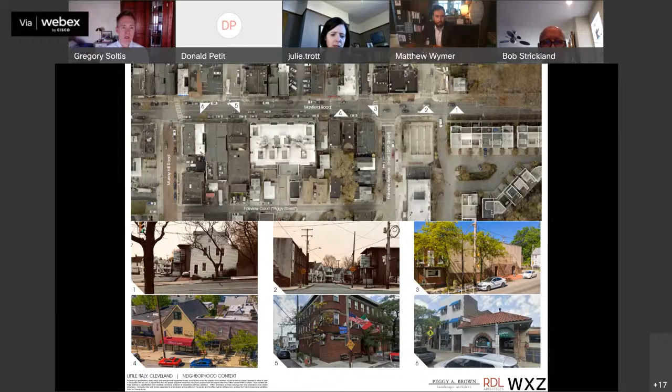So, existing context: Mayfield Road is the primary commercial thoroughfare through Little Italy, consisting primarily of mixed-use buildings, with the exception of a couple townhouses at the top of the hill and the church at the bottom. It's really all mixed-use buildings. These two buildings we're renovating have residential uses on the ground floors, which is inappropriate and not contextual to the street, but that was driven by fluctuations in use and demand.

Next slide. Here are some more images along Mayfield Road showing the context. You can see in the top right photo, number 3, what the buildings look like today — both facades have been sealed up and turned into residential apartment units. Next slide.

Mr. Soltis? Yes. I hate to interrupt you, since you covered this very well last time. I don't know if we need to go through all the detail, but would love to highlight the changes and the main things with the design, since you did a great job explaining the context last time. Thanks for being so kind and pushing me along.

Alright. I'll just mention real quickly that Piggy Street is a very different context. It's got a lot of service uses, garages. It's an alley street. There are some residential houses on the street, but it's a mix of all those things, and it's a completely different context than Mayfield Road. You can see some photos here. Next slide.

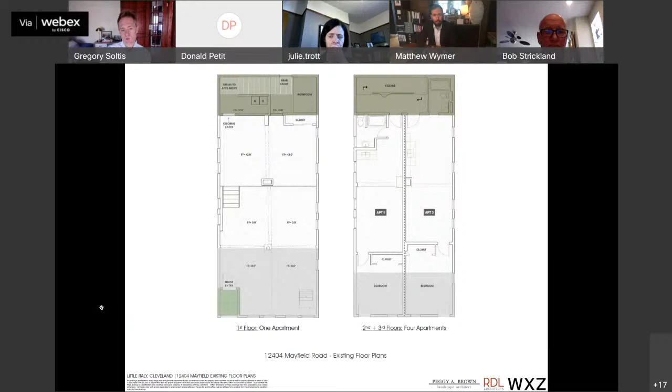This is what the 3-story building floor plans look like. What's really noticeable is that the front part of the building and the rear part of the building were additions, and the original building is the part in the center. It was an apartment on the first floor and then apartments on the second and third floors as well, 2 apartments on each floor.

The 2-story building had an apartment in the front and the back on the first floor, and the same on the second floor.

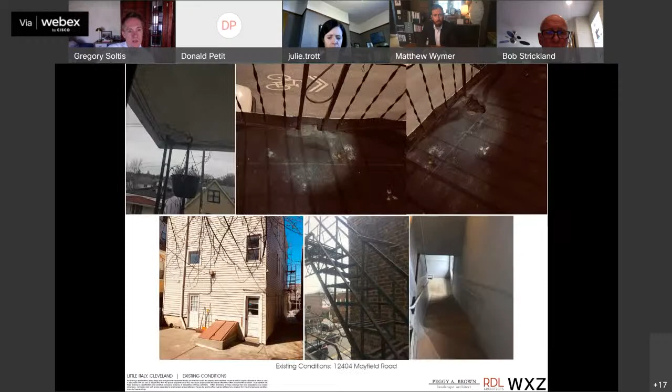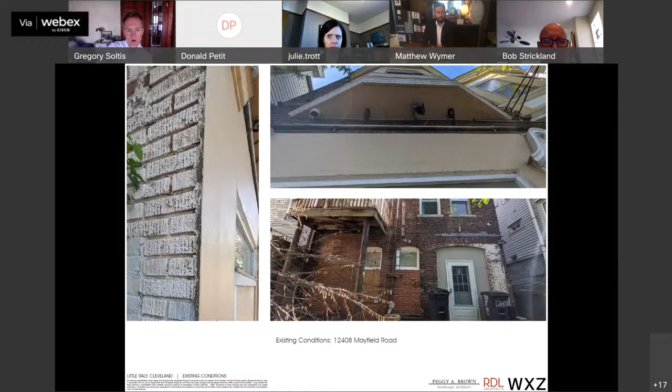These are some existing condition photos for the 3-story building, which is 12404. And this is for 12408. We plan on opening up those openings that have been bricked over.

You can see the condition on the front where they skim coated some sort of concrete material on the facade. Our plan is to try to remove that and replace the brick.

Some contextual photos of the 2-story building. The entrance is on the side on the alley.

That's the alley space that we plan on using as a primary entrance into the courtyard. The property line actually runs through part of that concrete on the left.

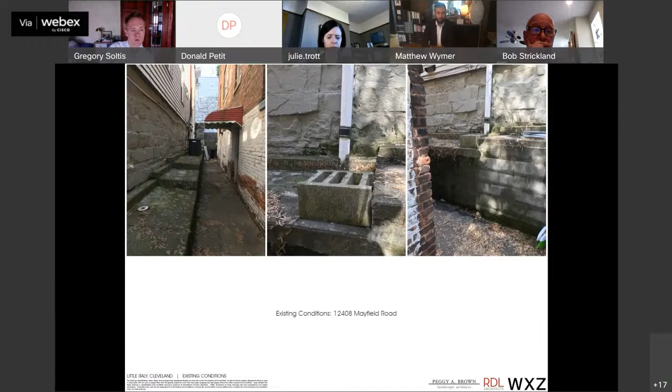Here are some photos of what the courtyard currently looks like. At the top, you can kind of see everything all together. The courtyard behind the 2-story building is lower than the one behind the 3-story building. The unit on Piggy Street actually is right behind the 3-story building. It seems like the 2-story building was built later than the other buildings, and they actually dug into the hill in order to create a flat sort of connection to the back.

This is of the building, looking from above on the Piggy Street building down into the courtyard. Existing conditions of the building on Piggy Street.

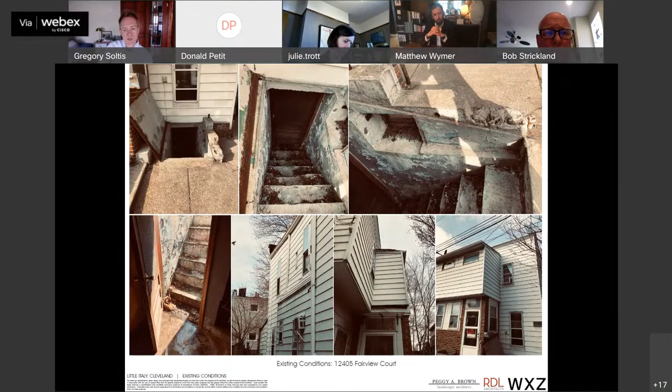Again, existing conditions. Interior conditions of the Piggy Street building. It was kind of hodgepodge together.

Okay, proposed plans. So you can see here, we are planning on renovating Building A and Building B, which you see to the right there facing Mayfield Road, putting commercial uses on the ground floor, demolishing the building on Piggy Street and building a new building that would accommodate parking for all 3 buildings on the ground floor with 2 condominium units above.

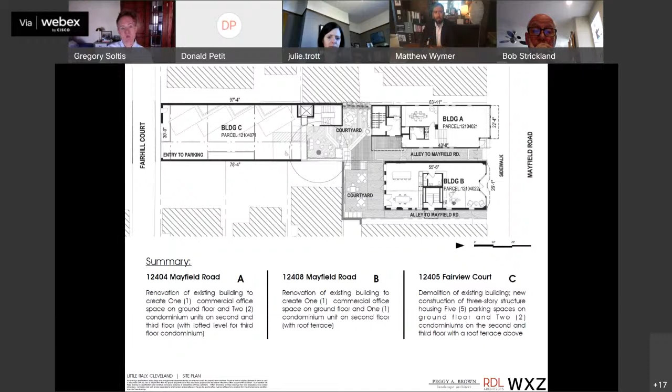Building A and Building B, their upper floors would also be condominium units, so it would be bringing for-sale housing into Little Italy, which is desperately needed, and then connecting the courtyard to create a shared space in the middle for all 3 buildings.

Peggy, do you want to go ahead and speak to the landscape plan? As Greg stated, there's a large tree in the middle of that courtyard, and one of the first things out of the client's mouth was that we need to save that tree. It's about a 36, 40-inch silver maple that's in pretty good shape.

So we're making every effort we can to save the tree, to the point of using pier construction, grade beam construction on the back of Building C, in order to not have any trenches back there for footers. And that's the same way we're using the deck material. So we're drilling holes and boring holes instead of cutting through the root system with trenches.

So on this plan, it starts to illustrate the upper deck. There's 3 different layers through here. You've got the upper deck, even with the level of the garage, then you step down into a median level deck with an umbrella table and some other sitting areas. The lower area, which is a paved area, is an entry for Building A. There's a ramp access out to the street from that point, so it's ADA compliant. And then you'll step down into the courtyard for Building B, the 2-story building, with a separate courtyard over there.

One of the interesting issues here was, what do we do with the trash cans? You drive around Mayfield area, Little Italy area, and all you see are trash cans all over the sidewalks and against buildings and whatever. So we've taken great strides to try and find places to hide those trash cans within the property so they can be wheeled out. You'll see the doors where they're closeted in some of these concealed areas that we're concealing with some screen fences and what we're calling a light tower. And then the ones for Building C will be within the garage at Building C.

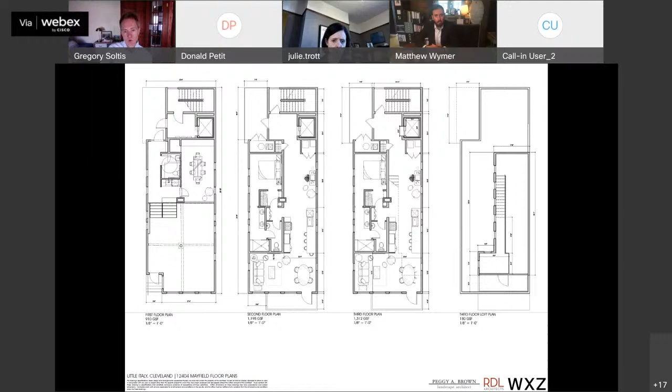And really defined the entry on the left with this tower, which is a condition that's kind of repeated throughout Little Italy on many buildings, and then highlighting the residential on the eastern, or really would be western, but on the right side, 2/3 of the building going up and having a change in materials, a metal paneling where you see the green gold, and then a fiber cement board siding. The building had wood siding originally, so we're proposing a fiber cement siding, recalling what was historically part of the building's architecture.

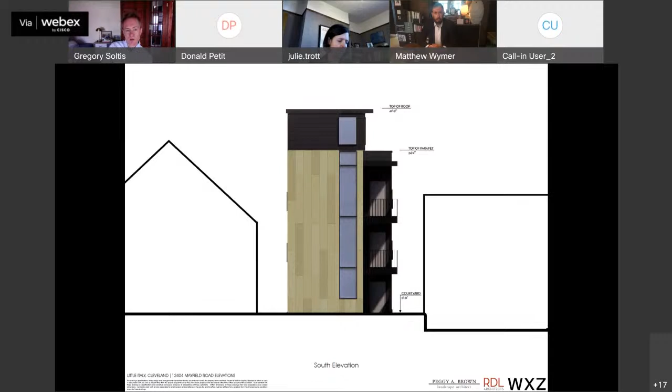Next slide. This is one of the alley views, which really no one's really going to see. The alleys are not wide unless you stand in there and look up, but this is what that facade looks like.

And then the balconies on the front that kind of overhang. And then the little loft that will have some sliding glass windows that open up on the top. Next slide.

For building 2, the first floor, we've created a core that has an ADA accessible restroom, a kitchenette space, and some storage that wraps the core for the retail and commercial space. The entrance to the unit from the alley is also within that core, shown there on the right off the alley space.

On the second floor, you can see the primary floor plan for the entire unit, which has stairs that go up to a rooftop deck.

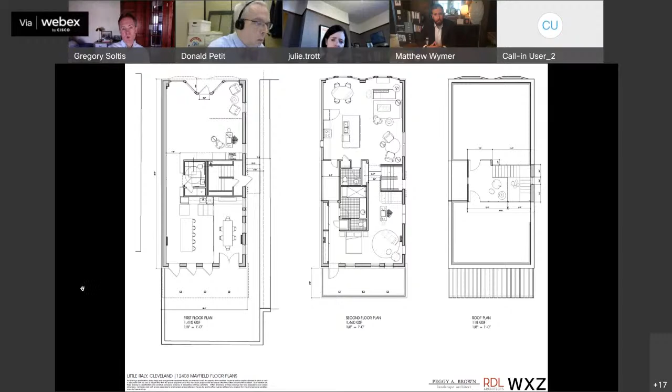We're going to restore the historic storefront, with a special door so we can get that bigger transom look all the way across, as seen in that historic photo. You can also see a little overhang on the side, further back in the alley, that denotes the entry to the residential unit up above.

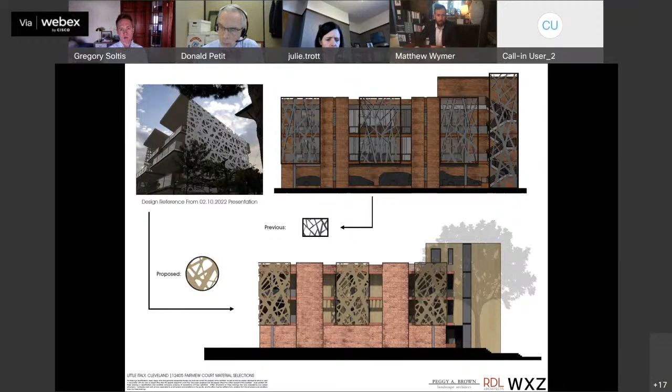Next slide. I think this was a concept image. That was the original elevation we showed you the first time around and how we've modified it down on the bottom. Next slide.

And here's our materiality, which I pretty much mentioned. This is we went through. Next slide.

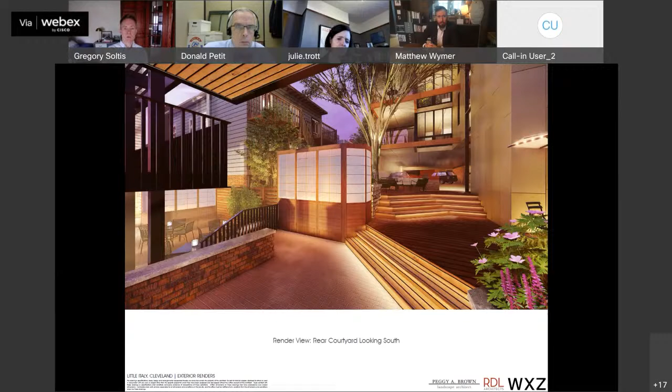So someone with a disability still, even though there are stairs and lots of grade change, still has the ability to enjoy the courtyard, whether from up there or down where we're standing right now. They can even be in the lower courtyard if they access that from the other alley on Mayfield Road. Next slide.

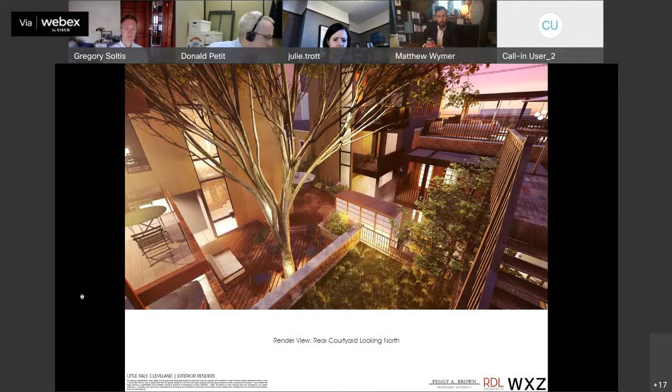This is a kind of an aerial view to give a better sense of how the courtyard all comes together. So you can see on the left, the new building on Piggy Street that has an outdoor sort of terrace for those units looking down into that decking that goes around the tree that Peggy mentioned to protect the tree's roots, steps that go down to that mid-level, and then steps again that would go down to the level where the entrance to the 3-story building is. You can see their balcony terraces kind of hanging off the back of the building there.

And then on the right, you get an idea of what that glass box on the top of the 2-story building would look like with the rooftop decks, the balcony in the back, and then the lower courtyard, and then again, that knuckle in the center of everything, holding everything together, that light tower. Next slide.

And I think that's the last, yes.

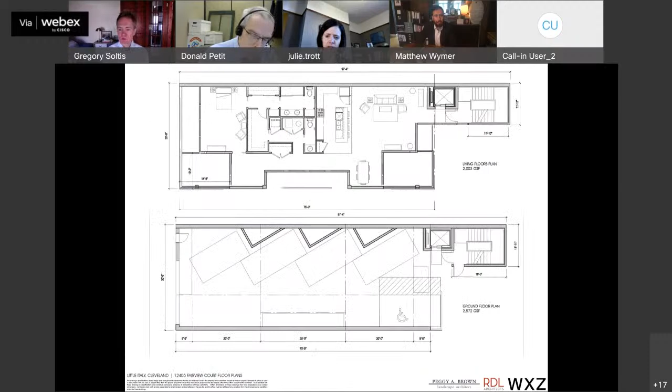We looked at the project several times conceptually, and we looked at it on April 19th for a vote. The fully renovated buildings on Mayfield Road, we think, are a great addition. Those buildings were in disrepair for years under the previous property owner.

We like the idea of how the storefronts will energize the street. With the addition of La Colina and these two projects, that whole side of the street has taken on a completely different life from what it was previously, an open lot and two storefronts used as residences.

So we really like the renovations the development team has made to those two front buildings. The committee really liked the plaza or garden area between the Fairview Court building and the Mayfield Road buildings, and thought it linked the two projects together nicely. We also like the idea of the for-sale housing, and the committee was okay with the demolition of the house on Fairview Court.

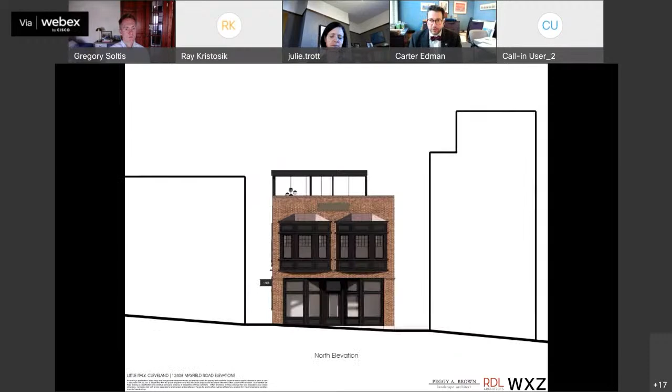Mr. Edman? Thank you, Madam Chair. I'll repeat a few things I said last time, but let me start by thanking you, Greg and Peggy, for the very thorough research and thoughtful, sensitive design approach. I particularly appreciate the additional renderings of the courtyard. I think that's going to be one of those extraordinary little urban open spaces, although it's not really a public space. It looks like a wonderful little space to be.

So I do have a couple of comments. On the Mayfield side, the facade composition and what you're doing with those buildings feels very appropriate in terms of the massing, the glazing, the relationship to the street. I may have mentioned this last time, but I want to comment on the dark gray and black coloration on both buildings. We see a lot of that right now.

I'm afraid that's going to look dated in a few years. When there's that much dark massing, it feels a little foreboding, particularly on the three-story building. I think it's probably appropriate for the rooftop level, like we see in this elevation, railings and things like that. But I'd like to suggest you consider some different coloration on both the clapboard siding and the bay windows here.

On this elevation, I wanted to ask about the copper metal roof panels on the bay windows. Does that have a coating on it, or is it allowed to naturally patinate? It's not actual copper, so it's a metal panel made to look like copper, so it will not turn green.

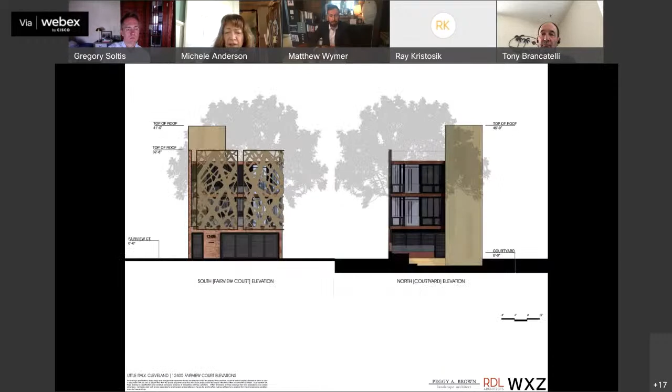The two bay windows on the two-story building — in all the historic photos, the bays are painted a lighter color so they stand out from the building, and these lighter colors also bring out the details of the bay windows. I would like to see something more along that historic line.

On the back of the building, I like the metal panels, but I also agree the design could be something a little more delicate. I'm not sure if there are other patterns incorporated into buildings nearby that could be used as a guide, made more abstract — I think the concept is neat, it's just that I'd like to see it executed with a little more finesse, a more delicate pattern.

So those are my comments. Thank you.

I'd say, for your comments and Mr. Edman's comments, that we are continuing our research — I've learned a lot about historic storefronts in the past couple months. So we're continuing to find appropriate historic colors, like Sherwin-Williams has in their palettes, and also refining the design on the panels in the back.

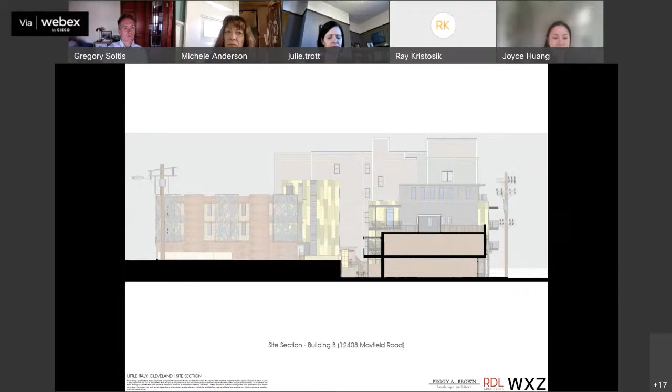Thank you, Director Huang, and thanks for recognizing the tree, the reference to the tree, because I forgot to mention that. I did not pay her to say that.

Thank you, Director. Mr. Strickland? Thank you, Madam Chair. I want to first start by commending the applicant and the architectural team for this fantastic project and the vision the owner has in rehabilitating these historic structures and replacing the one on the back.

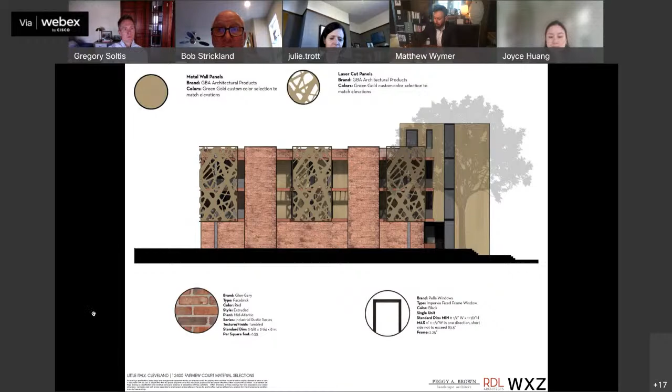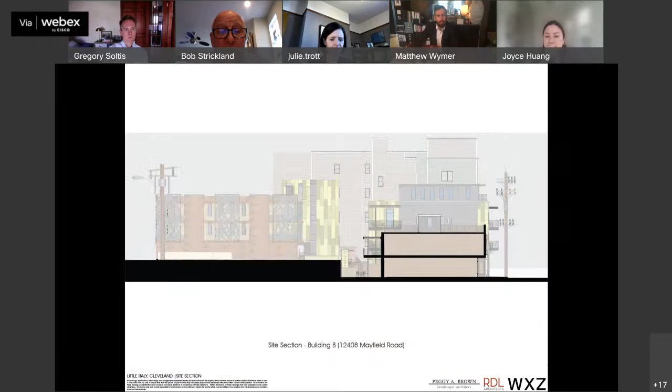In terms of the facades on Mayfield Road, Building B, the two-story building, clearly is a significant restoration of a historic building. I don't get that sense when I look at the three-story building. It looks like a totally modern building with no reference whatsoever to the historic fabric. So I certainly have a problem with that. I don't see why the focus was on clearly a historic restoration of Building B, and the same approach was not taken with Building A.

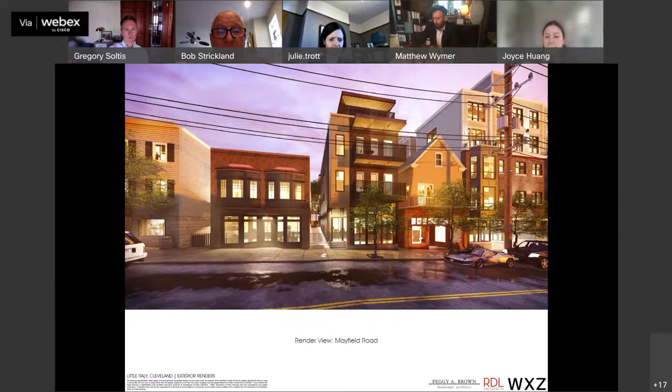Personally, I would like to see some semblance, some recognition that it still is a historic structure represented in the renovation of the facade. In terms of the back building, I had questioned during the concept phase what impact the western elevation of Building C would have on the adjacent neighbor. It looks like just a big blank monolithic brick wall, and I wondered if some articulation could be added to break up the monotony and its impact on the western neighbor.

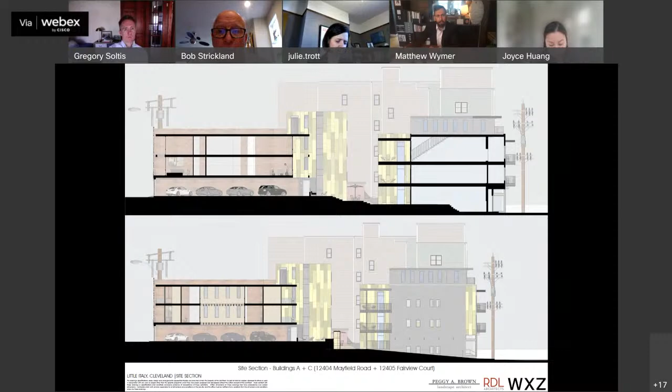Thank you for your comments, those are great. To deal with the wall first, Matt and I are looking at different brick types, or even, by fire code, if we could potentially introduce some glass block into the wall to break it up and also allow light into the unit, so that is under study. And the stair tower that you see, those aren't actually windows either, because by fire code we're not allowed to have windows. So those are spandrel panels, to try to break up the geometry of the stair tower, and we are looking at that for the wall as well.

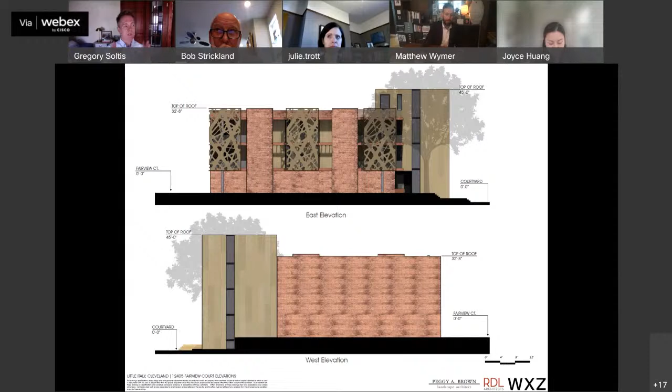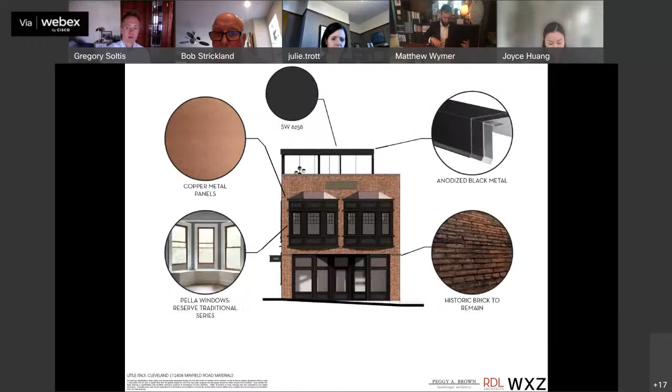With reference to your comments on Mayfield Road, the approach we took involved a lot of research, reading the guidelines from the Secretary of Interior's standards. The recommendation was that if you have a lot of context or existing photos for a building and a lot of its existing architecture left, then a full historic renovation is the right approach. For a building that's been added onto, where you don't know exactly what the facade looked like—for example we don't have a photo of this addition on Mayfield Road—the Secretary of Interior's guidelines recommend a contemporary interpretation as the appropriate way forward. So we wanted to reference the historic by keeping the balconies and reopening the glazing on the ground floor, although we don't know exactly what that looked like. That's why we took this approach with this building, following the Secretary of Interior's guidelines for each of the buildings.

I would also add that besides the balconies, the majority of the building is going to be covered with lap siding, which is a throwback or a nod to the fact that in all the photos we have, the building was covered with siding. And we wanted to open up the corner.

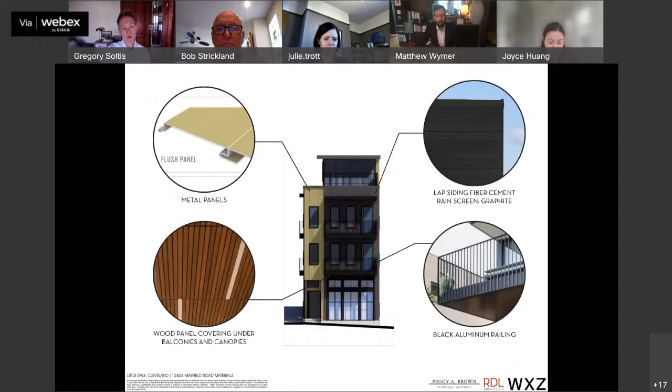Carl, can you go to the rendering on Mayfield Road? The reason for that is the alley is going to really be the primary entrance to almost everything for these three buildings, so we don't want that alley to feel hidden or secluded. We want it to feel open.

So by opening up that corner, using this building that we don't have the exact historic photos for, to accentuate that corner with the tower, open it up on the bottom so you can see entry into the courtyard. That will allow people to say, oh, that's the entry if I want to go to the residential units, or to have access to the offices in the back if I'm in a wheelchair. So that was our thinking, but I appreciate your comments.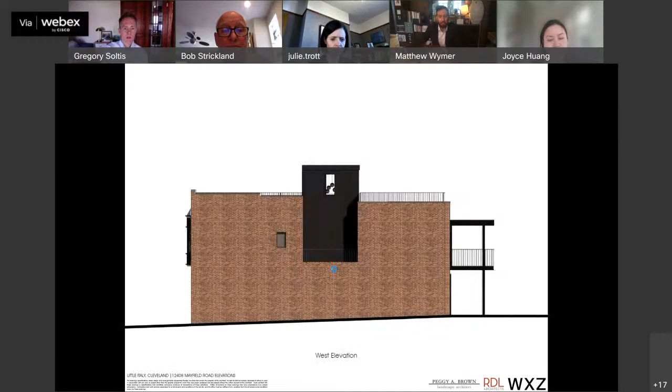If you go, Carl, can you go to the beginning where we have the historic photos? So the early 20th century are the photos we have, but by then the building had already been altered, because there's an actual stone, like limestone or sandstone, sort of foundation walls in the building. And on both the front and the back of the building, it changes because they added onto it.

If you could go forward a few slides, there you go, right here. So you're saying this front elevation was an addition? Originally the building was set back from the street, yes, by something like at least 4 feet, if not more, right Matt? So they added this whole front facade to the building.

You can see the spindles have, I don't know, it looks like some neo-colonial detailing or what have you, which, and you guys are better at the historic stuff than me, so if I'm using the wrong words, but you know what I mean.

The older photos show balconies, of course, but from what you can make out they were much simpler. You can't really see exactly what the ground floor was, but you can see that it probably was open, probably a retail storefront.

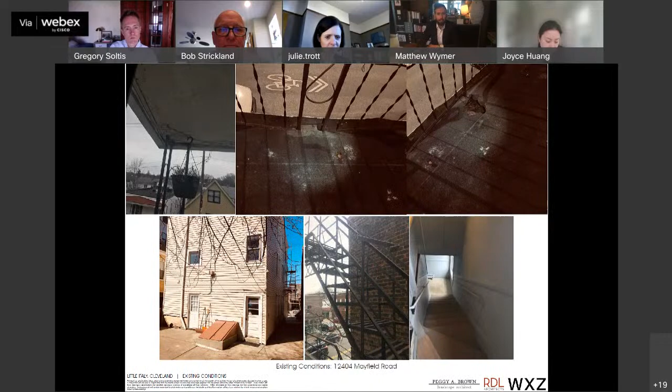All right, Carl, could we go forward to the proposed elevation to see how that's represented? Yeah, obviously it's a totally different interpretation of the original 4 openings.

All right, so I've made my comments. I'm anxious to hear from the rest of my commissioners, a good discussion. I certainly appreciate your comments and understand the point that you're making.

I will say this is an odd structure. It's unique in a sense because there were additions at different points in time, so trying to get down to the original structure and character of the building is tricky. But we're trying to be as mindful as possible of the surrounding context and what the structure can contribute to the neighborhood.

Thank you for the questions, Mr. Strickland. I'll just interject my feedback. I think much has been said already. I think this is a great restoration development for this area. I think you're taking some buildings that have clearly been underappreciated and bringing them back to their vigor. I don't mind the black or dark colors as much as some of the commission members.

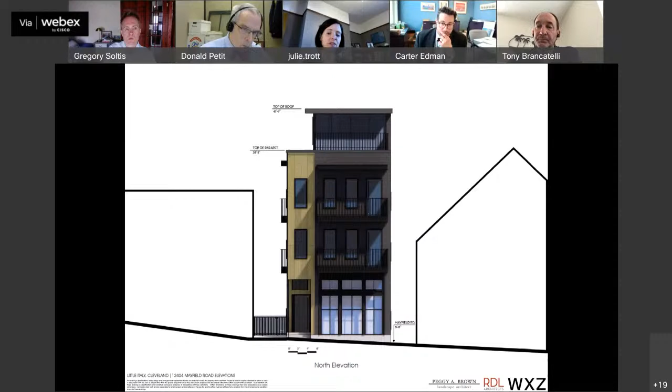Any further discussion? Great, Mr. Petit, please call roll and announce the results. Ms. Anderson, yes. Mr. Bonesi, yes. Mr. Brancatelli, yes. Mr. Dreyer, yes. Mr. Edman, yes. Director Wong, yes. Mr. Strickland, yes. Ms. Trott, yes. The motion passes unanimously.

Thank you. Would someone like to make a motion for the renovation addition of Building B? Mr. Strickland: Madam Chair, I'll move to approve the project as presented with consideration of changing the colors of the bay windows in the storefront to a lighter color that might better represent the historic palette.

Thank you for the motion. Do we have a second? I have a question. Do we want to finish the process and ask it during the question period, or does it affect the motion that's on the table? I have a question about the motion. Well, there is a motion on the table, so we have to have it seconded. There can be discussion, it can be revised. I'll second that motion.

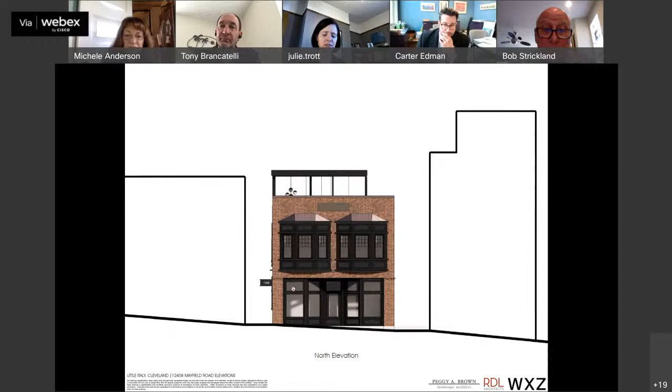Right, Mr. Petit, please call roll and announce the results. Madam Chair, I just want to clarify who made the second, Mr. Edman, is that correct? It wasn't Mr. Brancatelli? I think we both said it at the same time. Okay, so either way, just want to be sure.

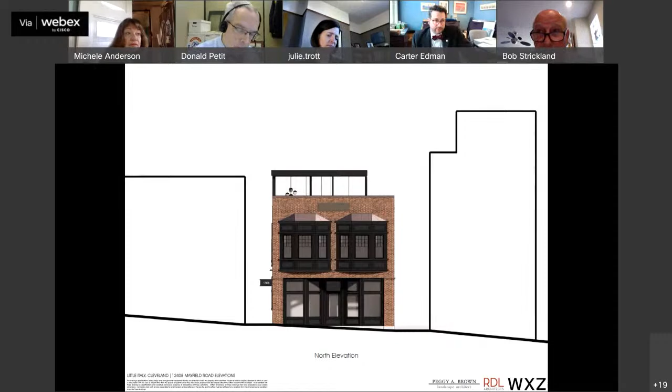Thank you. Ms. Anderson, no. Mr. Bonesi, yes. Mr. Brancatelli, yes. Mr. Dreyer, yes. Mr. Edman, yes. Director Wong, yes. Mr. Strickland, yes. Ms. Trott, yes. Madam Chair, the motion passes 7 votes to 1.

Any further discussion? All right, Mr. Petit, please call roll and announce the results. Ms. Anderson, yes. Mr. Bonesi, yes. Mr. Brancatelli, yes. Mr. Dreyer, yes. Mr. Edman, yes. Director Wong, yes. Mr. Strickland, yes. Ms. Trott, yes. The motion passes unanimously.

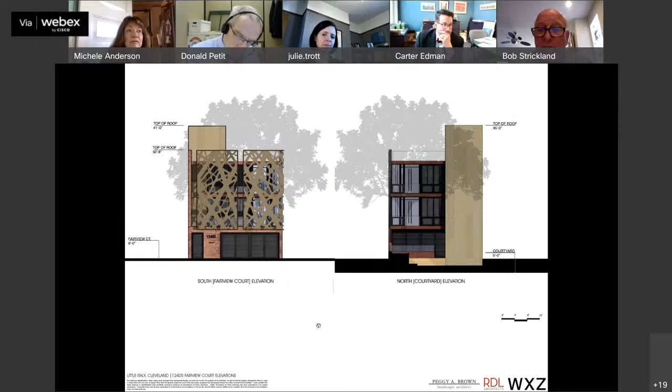Thank you. We'll move on to our last item, which is the new construction of Building C. Would someone like to make a motion? Mr. Strickland: Thank you, Madam Chair. I'll move to approve Building C, the building at 12405 Fairview Court, as presented, with a recommendation that the west elevation be studied to provide, as code allows, glass block openings or some articulation in that elevation, and to study lightening up the graphics on those metal panels to make them more open, as a recommendation.

Thank you, we have a motion. Do we have a second? I will second that motion. Thank you, Ms. Anderson. Any further discussion?

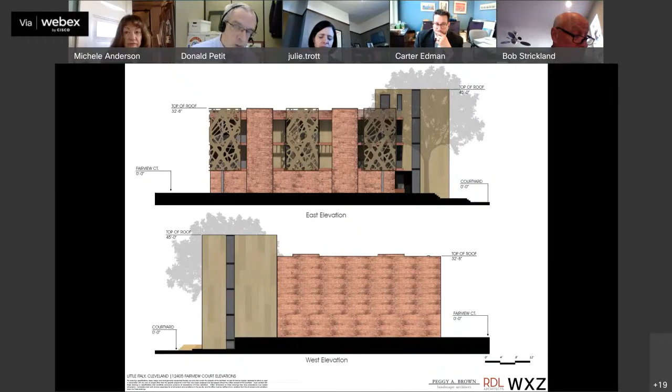All right, Mr. Petit, please call roll and announce results. Ms. Anderson, yes. Mr. Bonesi, yes. Mr. Brancatelli, yes. Mr. Dreyer, yes. Mr. Edman, yes. Director Wong, yes. Mr. Strickland, yes. Ms. Trott, yes. The motion for the new construction passes unanimously.

Thank you, everyone. Thank you, everybody. Thank you. We look forward to seeing your project move forward. Thanks, guys. Likewise, have a great day. You too, take care. Thank you.

We'll move on to our next applicant, located at 2227 Payne Avenue, lobby renovation and elevator addition for the Norma Herr Women's Center.

I can go over these or skip some of the context if you would prefer. You can do just a very quick overview, since we just have the highlights of the existing conditions and then into your design. And since we just saw you recently, if there's been revisions or developments that would be wonderful.

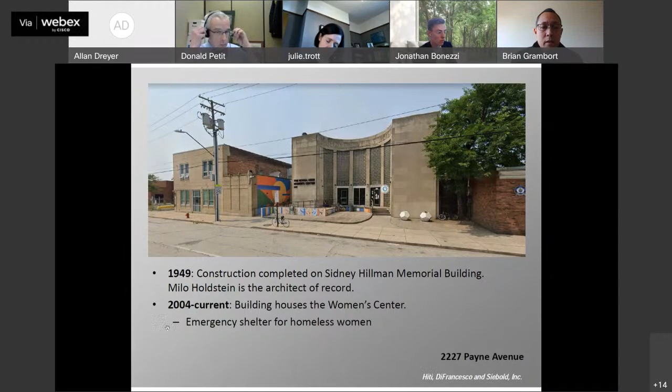This is the main facade on Payne Avenue, the original Sidney Hillman Memorial Building on the right, and then what we've been informed is the Fox Film Building on the left. Those two were joined by a link connector in 2009, I believe. Next slide.

The first element that we're going to be replacing is the glass block. Photos on the right are the existing glass block, fluted with 10 parallel ribs and installed in a quarter turn fashion. The 10 rib glass block no longer exists and is no longer manufactured. We're proposing a 13 rib glass block of the same size, 8x8, installed in the same quarter turn pattern in all 5 of those vertical openings along the main historic front. Next slide, please.

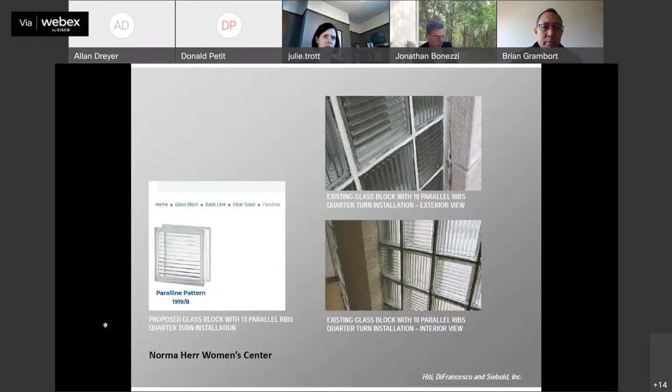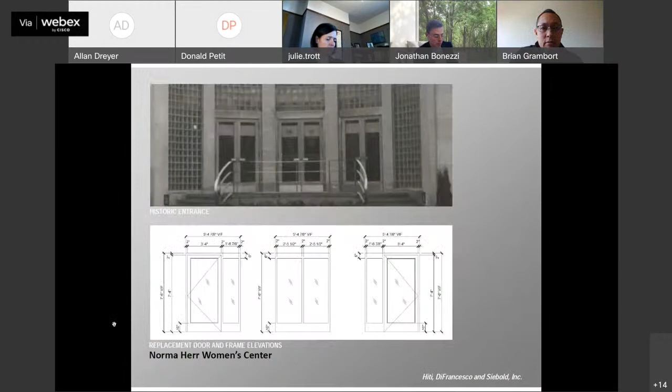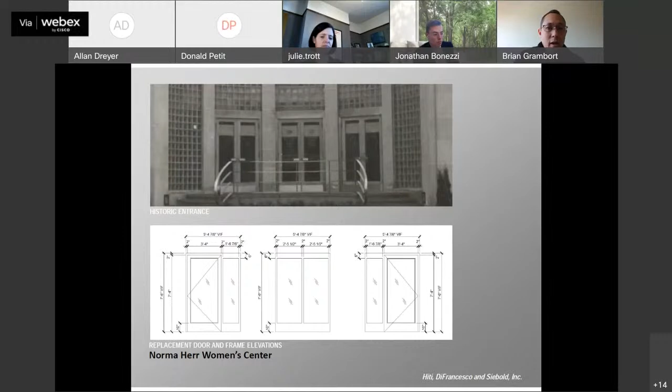This is the proposed orientation of the new doors. We're creating a symmetrical orientation as opposed to the asymmetry in the existing door layout. Based on previous comments from design review, we are maintaining the 10-inch bottom rail across both the door panels as well as the side lights and the center fixed panels, as you see in the line drawing below. The doors themselves are medium stile, so they have a 6-inch top rail, and we're also maintaining that same horizontal band, trying to be more consistent in the layout, similar to the original.

Next slide, please. The platform itself, the stone platform, has experienced quite a bit of water infiltration and damage over the years. It is not accessible anymore, even though there is a ramp, and there are many trip hazards. So we're going to be removing that, replacing it with a new concrete platform and concrete steps, but still with stone facing. On the bottom right-hand photo, you see in blue, yellow, and a reddish orange, some public art that had been made specifically for this building in this specific location. We're removing those, salvaging them for the owner, but then installing some new stone facing along that front, and then also on the risers on the steps.

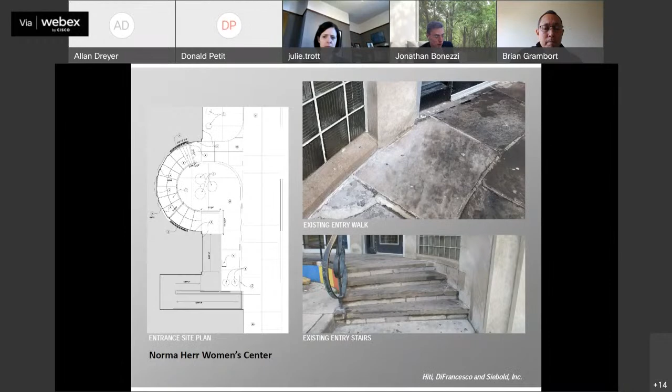Our trash cans we're proposing at this location to try to minimize the debris around the site. Next slide, please.

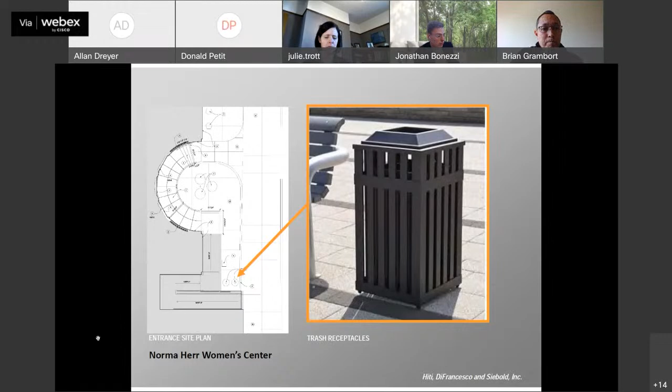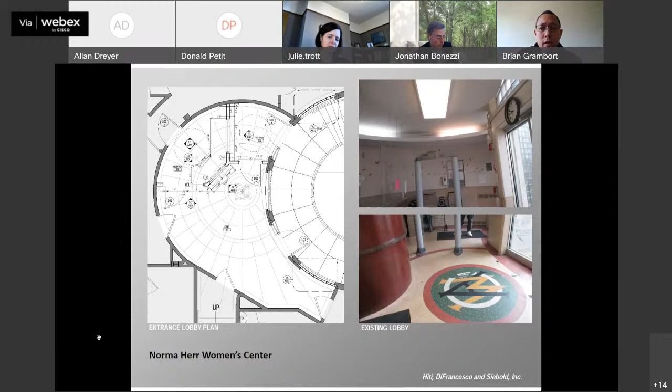Some interior work will not affect the fenestration, the openings, or the glazing on the main facade. We're also going to be doing some repair work to the historic terrazzo flooring and sills on the interior. Next slide, please.

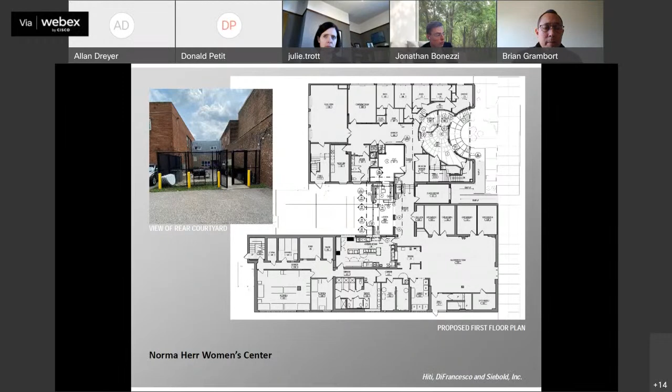Based on the size of the hoistway, we will be intersecting the center window of the 3 that you see in the photo. We will be infilling that, but still maintaining the brickwork around those openings, and we'll be setting that brick infill back to match the plane of the main elevation. It won't be pulled out to the front of those brick details.

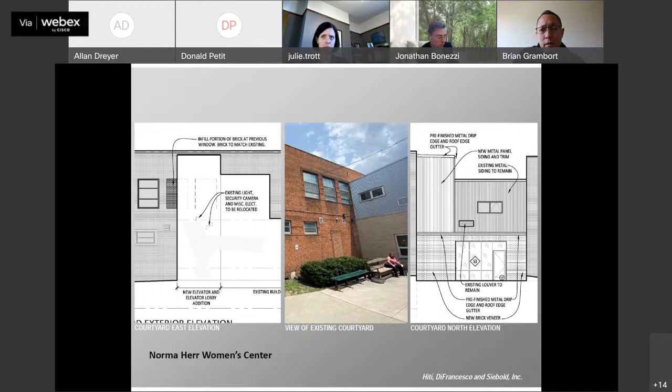One of the comments from previous design review was on the louver you see on the right-hand elevation. Previously it was drawn incorrectly as overlapping the hoistway. We've verified it is out of the hoistway, so there won't be any issue overlapping that.

That summarizes the project. I'd be happy to answer any questions.

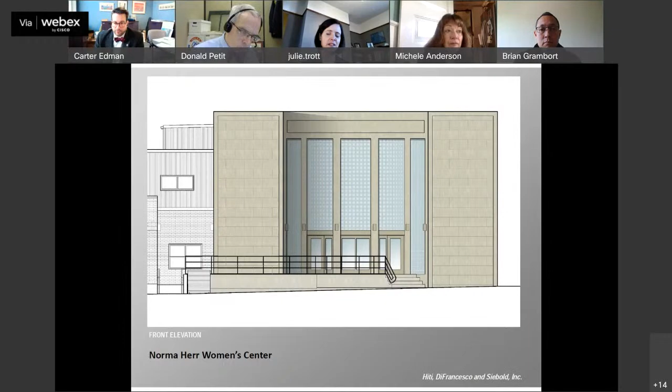That Mr. Brancatelli? Yes. All right, learning your voice. Just give me a meeting or two.

All right, so we have a motion, we have a second. Further discussion?

All right, Mr. Petit, please call roll and announce the results. Ms. Anderson, yes. Mr. Bonezzi, yes. Mr. Brancatelli, yes. Mr. Dreyer, yes. Mr. Edman, yes. Mr. Strickland, yes. Ms. Trott, yes. The motion to approve as presented passes unanimously.

With that, what I'd like to do is just a quick little background. Our student population has been growing over the past probably 4 to 5 years, and we've gotten to a population where our residential halls to support the students are not adequate. So what we're looking at doing is adding 600 new beds to the south side of our campus, and this would be primarily for our second-year students. Next slide, please.

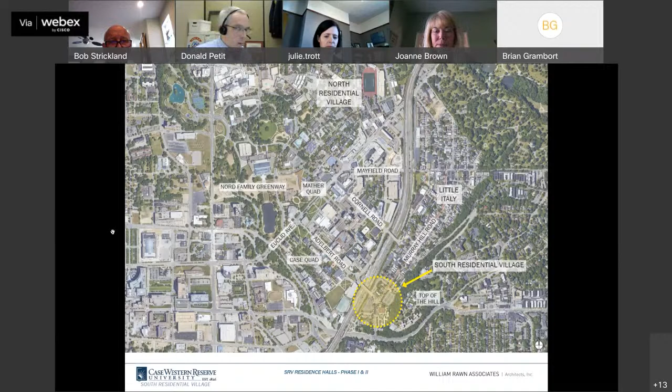We are proposing to put these two buildings on a current parking lot that is next to our south dining facility called Fribley Commons. That is a project that we did just renovate, finished that up last year, and it has capacity for additional students. This is a parking lot that we'll show later how we are reallocating the spots, but this is the actual location. So no buildings will be demolished for this work. Next slide, please.

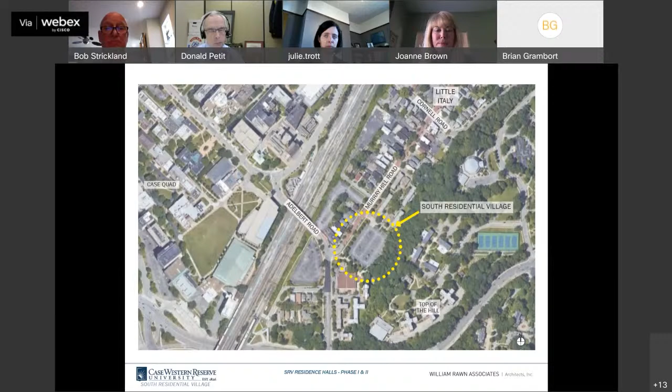This is just to indicate that this is in following with our master plan that we did in 2015 that did recognize the fact that the university was planning additional growth in the student body. What we're talking about today in this presentation is phase 1 and 2, which are 2 buildings, 300 beds apiece, or 600 beds in total. Next slide.

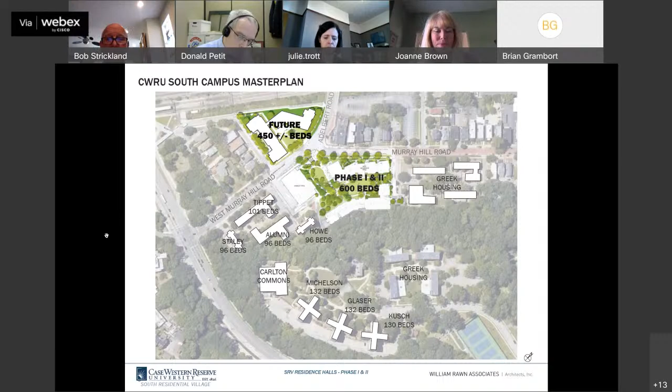As I mentioned, this is for our second year students. We have first year students that come and all reside on our north side, and then programmatically we like to have the second year students reside on our south side. We are a little bit of an elongated campus, and this way we get the students to experience both the north and south sides, as well as many students in second year are already allocating or determining their majors, and the Case Quad is very convenient to the south side. We do have the project goal to open in the fall of 2024. Next slide.

This is just a very quick project schedule. We did start this project prior to COVID hitting, and we put it on a pause. We're now going through the design completion, as well as hoping to begin construction in August of 22 with a 2-year build out, so that in August of 24 we can welcome new students. Next slide.

With this, I'm going to turn it over to Sindhu Meyer, who's going to talk a little bit more about the original change that we made from January. And then what we'll do is we'll start to talk about building materiality.

Thank you so much. Thanks, Joanne. We had been meeting with your group and with the Little Italy group since January 2020. And as Joanne said, there was a pause. And initially we had this layout where the massing was having a little more, a couple more beds on the Murray Hill side.

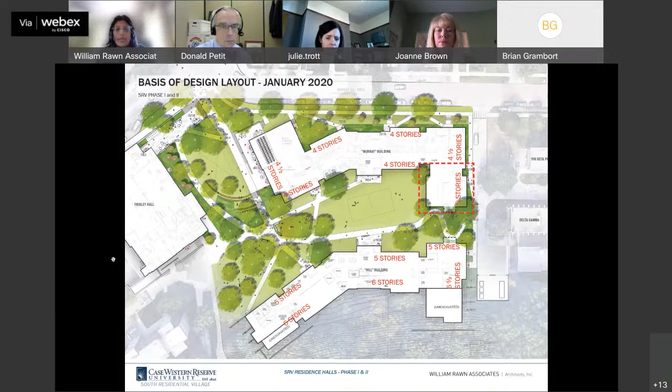With your recommendations, we lopped off the area in the dashed red box and attached it to the Hill building to reduce the massing along Murray Hill and make it more in keeping with the size and scale of the neighborhood. We further designed and worked towards developing the elevation along Murray Hill to make it as residential and in keeping with the pedestrian feel.

We worked on the landscaping. We built up 4 porches for the individual adults who will be living and managing the students along Murray Hill, so they will be your neighbors as you go forward. We also worked on the elevations to break it up so it does not seem to be a large building along this pedestrian and residential street.

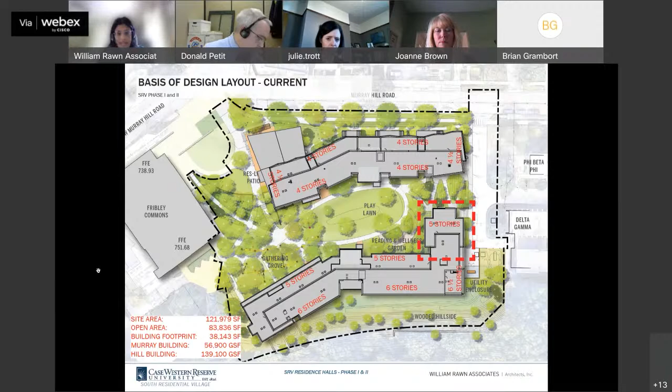I know most of you have already seen this presentation, so I'll be quick. The ground floor has our public amenities and 4 apartments for the adults who manage the students and the building. The 600 beds are split between the 2 buildings.

The Murray building is along Murray Hill Road, and the Hill building is up against the hill. The split is 172 on Murray and 428 on Hill, again addressing the issue of keeping the massing as small as possible on the Murray Hill side while still maintaining the program requirements.

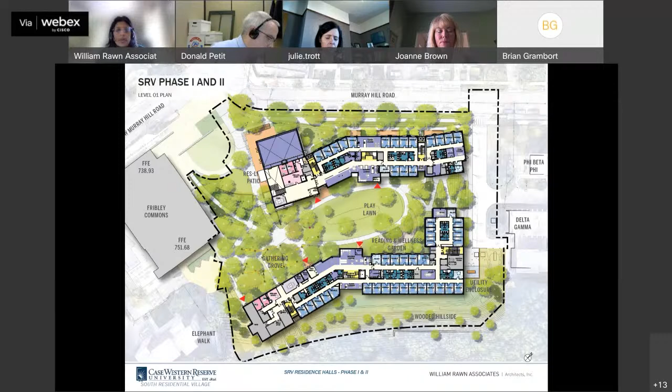We're adjacent to Fribley Hall, which was recently renovated, and we took some of the cues for the finishes of our building to be in alignment with Fribley Hall as well as the neighboring buildings.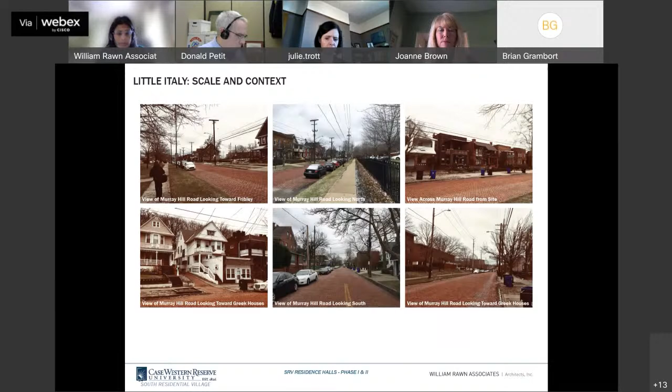We did walk up and down Little Italy to get a feel of the neighborhood, the scale, the context, and the importance of front porches and setbacks from the street. We also looked at some of the newer buildings approved by the city and how they work to break down scale with massing, material, and detailing.

This is Fribley, some bigger pictures of the building recently renovated by Case Western, and it'll be our immediate neighbor for the buildings we're proposing.

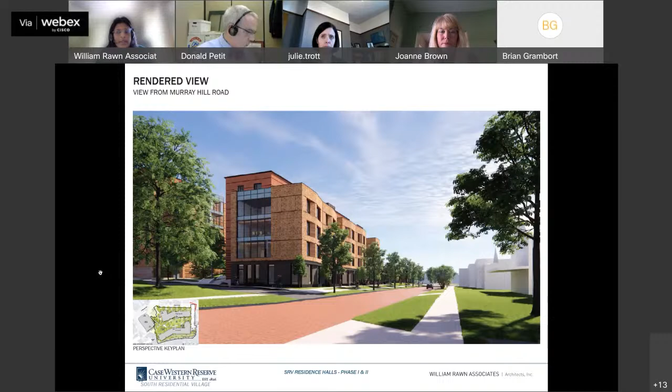This is a view from Murray Hill Road looking at our building from the north end, and you can see our undulating elevation to help break up the scale.

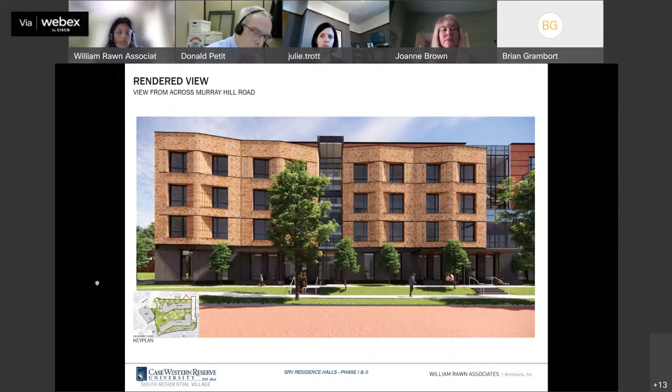Here's a head-on facade elevation of what you'll see from Murray Hill Road, showing how we've broken up the massing with brick detailing as well as curtain wall to break up the longer elevation. Below it, another comment was that the dark gray stone may look a little too dark, but we'll show you the actual stones we're looking at, and they're actually quite medium, so it won't look this dark.

Here's one of the front porches for the apartments, and the multi-purpose room on the corner that will be an inviting beacon for the district and also help put eyes on the street. Thanks.

Okay, I'm just going to talk a little bit about zoning. We are, as we go down the design path, also pursuing a zoning map amendment. Currently our site is zoned MFC1, which reduces our front yard setbacks as well as our height and massing. We are surrounded by MFC2 and MFE3.

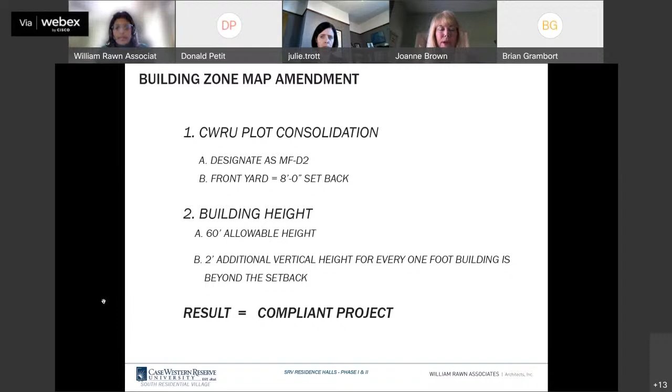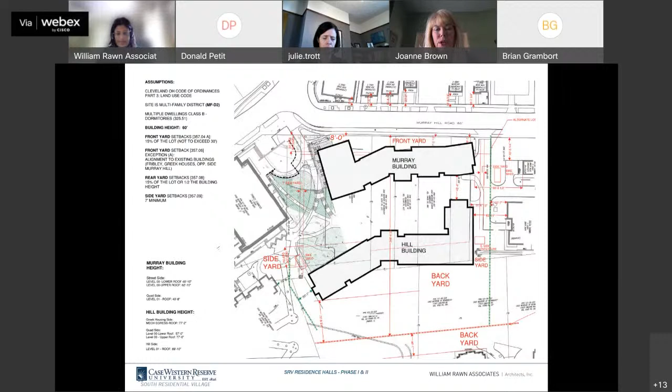In these, again, I'm just going to breeze through these. This is just showing a larger space and where our front yard setbacks are. Within the map amendment process, we're looking to have, along Murray Hill, between an 8-foot and a 20-foot front yard setback, and that would be stipulated in the final verbiage that will go through council.

This just indicates, by that red line, how we're now in compliance with our height. There is an element of the zoning code that allows you to gain height for every foot of frontage you step back.

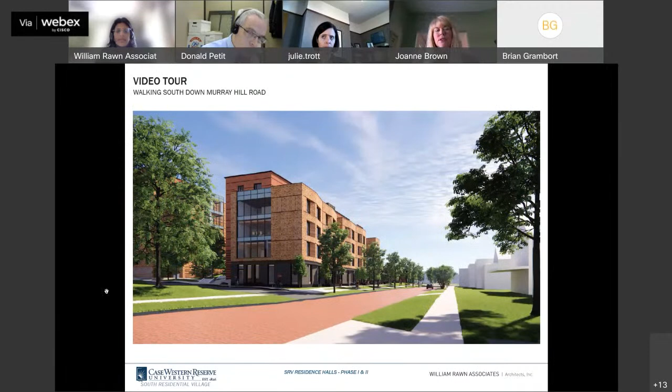There was also a lot of discussion about the front street parking that runs along the site. Let's see if there's anything in that— okay, but this is a video tour. So prior to this, along Murray Hill there are street parking spots allocated by the City of Cleveland, and there was a lot of discussion about what would happen to those.

We worked with Little Italy as well as our folks in our parking and traffic group, and I'm happy to say that for the duration of this project, we're going to relocate the permit parkers along the street into lot 47, which is accessible by Adelbert Road as well as behind our current art studio. So we will not lose those parking spots, and those will be allocated to Little Italy residents during that time.

And then we do have a walkthrough, Sindhu. If I don't know if that will work, Karl. Are you able to give Ryan the presenter privilege and then he can share the video? I am not. Okay.

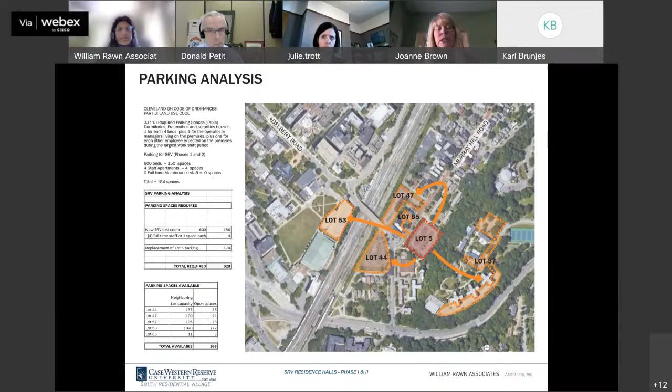Well, with that, we did have just a video that showed the pedestrian experience along Murray Hill that really helped with understanding that view of the massing. And with that, we'll turn it back over to the commission.

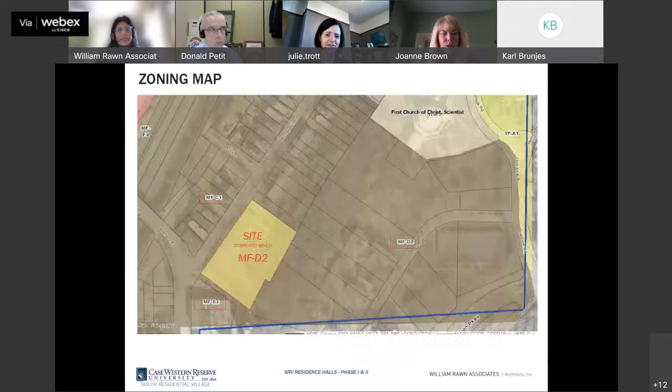All right, thank you for the very thorough presentation. We'll begin with feedback from the local committee.

Thank you, Madam Chairman. We've been working with Case on this project, it seems, for several years now. We've been involved during the whole process with staff meetings and conceptual reviews. We hosted a community meeting on April 17th that Joanne referenced, before our design review committee took action on April 18th. The meeting was attended by about 20 stakeholders. Comments focused more on parking, logistics during construction, conditions of the Murray Hill brick road after construction, and trees. Not many comments revolved around design.

Case is committed to looking at solutions to these problems, and LIRC will be involved in this process the whole way. As one of the things, we're going to ask the Board of Zoning Appeals, when they approve the zoning, to not allow residents at those addresses to obtain residential permit parking passes, so they cannot take parking up for residents on Murray Hill.

During our initial meetings with Case, we were always concerned about how the project affected Murray Hill Road and how it would look from the street. I think the group has done a very nice job of making it fit. They've kept the front four stories on the front, added some height to the back. One issue we always had was with the upper floor in the back, how it looked, and I think they've done a nice job increasing the glazing and making it somewhat disappear when you're on Murray Hill or across the street.

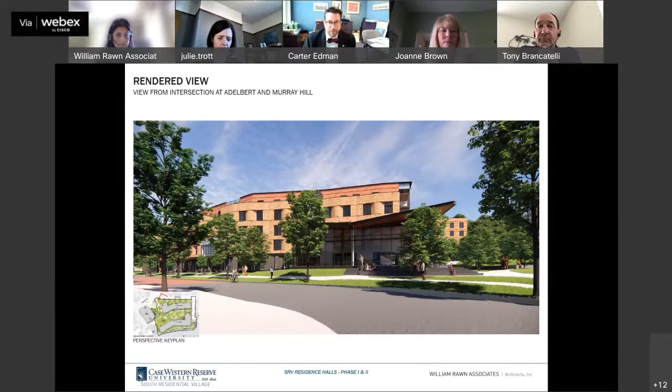A couple of comments. I think the relationship to the street that you've created, the way the setback varies, that relationship is really good and vibrant. And I think a real key piece to that is those porches, which is a real Little Italy thing and a Cleveland thing, and it's something you don't typically see in student housing, so that's a really nice touch.

I also think the exterior spaces you've created around the intersection with Adelbert, and the glassy commons room building you'll see as you come up Adelbert—currently there's a nice new building, but it's never been a great approach into Little Italy. I think between this and the open space you've created next to it, it'll be a much more gracious way to come from Adelbert, from the campus into Little Italy.

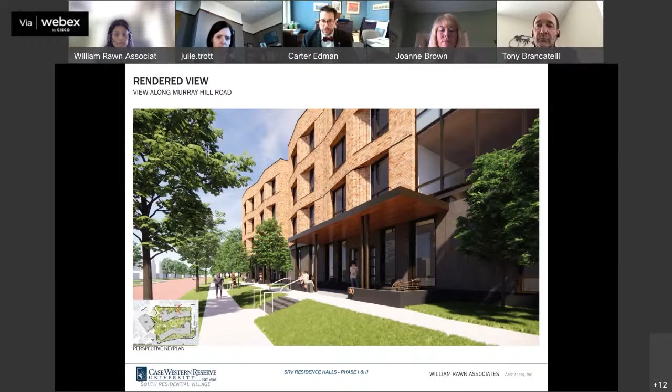One question is, I believe the last time we saw this, you had indicated you were considering a Cold Spring granite for the first floor, but obviously you've ended up with a different gray color, and I'd like to hear a little bit more about your process and decision on that.

We did have samples of Cold Spring granite, and we found that it was almost too white, so we like this medium gray better. This is a small piece, but it has some nice veining in it, and we're planning to use larger slabs, so we think it'll be a nice rich stone on the ground floor of the building.

Thank you, Mr. Edman. Additional questions or comments from the commission?

I'll interject mine now while we wait to see if there are others. I do like the project. I agree and like how you've now created sort of the portal or the identity for the campus, between the renovation of this piece on the screen and the adjacent building. I like how you stepped through the building.

My only comment, similar to before, is that I appreciate your change in color of the brick, but I wonder if it's enough to really have the impact and differentiation you're trying to achieve. I'd encourage you to study your brick colors on site to see if there is enough contrast in those two bricks to break down the scale the way you're trying to.

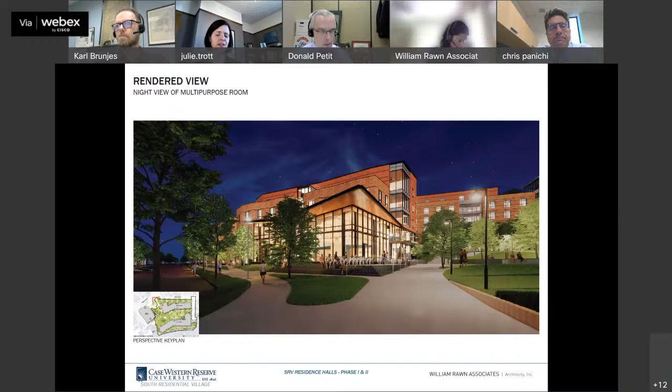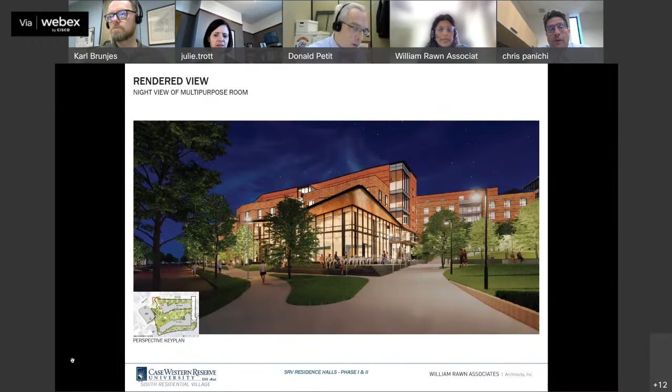All right, Mr. Petit, please call roll and announce the results. Ms. Anderson, Yes. Mr. Bonezzi, Yes. Mr. Brancatelli, Yes. Mr. Dryer, Yes. Mr. Edman, Yes. Mr. Strickland, Yes. Ms. Trott, Yes. The motion passes unanimously.